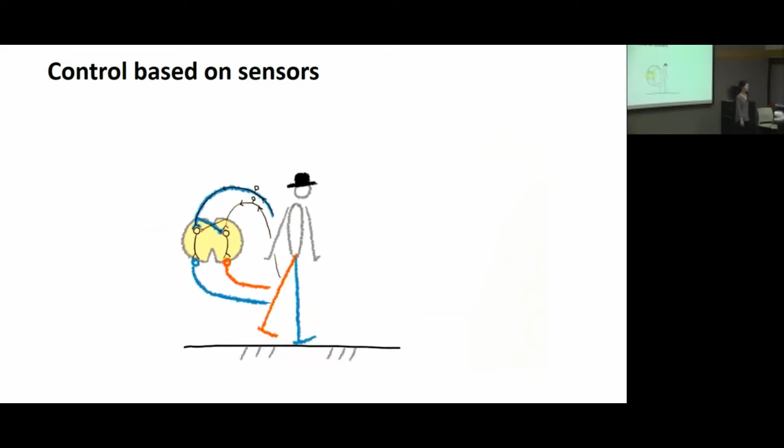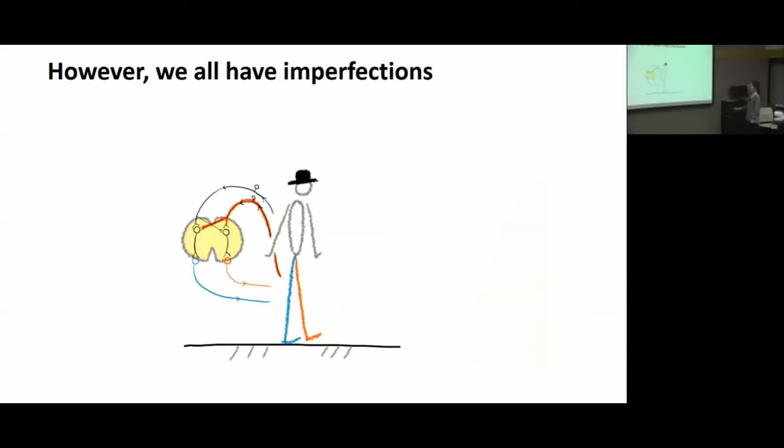However, life is not that easy. We all have imperfections, and sensors are never perfect, and sometimes it can tell you some incorrect information. So for example, here, the red leg didn't touch the ground yet, but the sensor thought it touched the ground by some noise or something. So it is telling incorrect sense of ground contact.

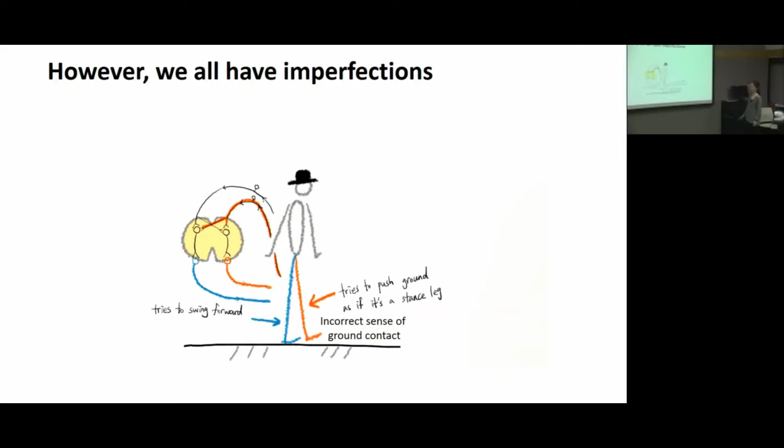And then what happens? Red leg now thinks that it is contacting the ground and it is now a stance leg. So it tries to push the ground, while blue leg thinks it is a swing leg now and tries to swing forward. And what would be the result again? Yeah, it fails again.

So for summing up a little bit, there are two conflicting ideas of generating cyclic movements. On the one side, there is central pattern generator, CPG, that generates rhythmic motor command without any sensory information. And on the other side, there's sensory reflex to generate motor command, now without a pattern generator.

So what's going on? What is generating pattern? Actually, both are working together. It is reported that it is better to have both. But the problem is that we don't know how to integrate two. These competing ideas, this conflict between two ideas goes back to 100 years ago.

Like here, Graham Brown suggested that CPG like this, even if he didn't really call it as CPG, but he just called it as two half centers mutually inhibiting each other, can generate cyclic movements like stepping. And about the same time, Sherrington suggested that sensory reflex can generate rhythmic motions like stepping.

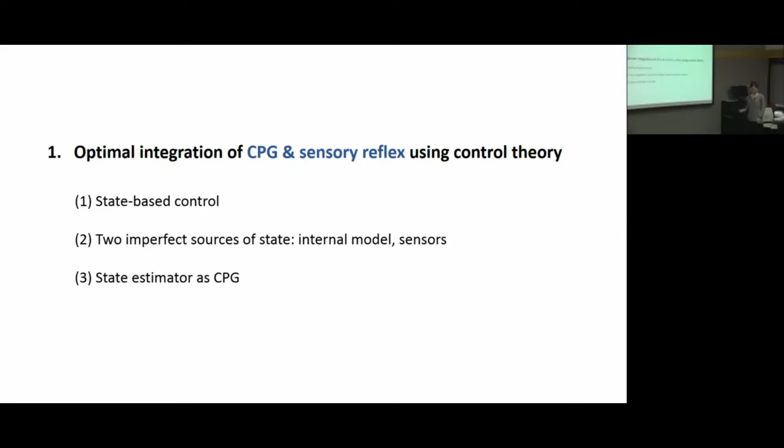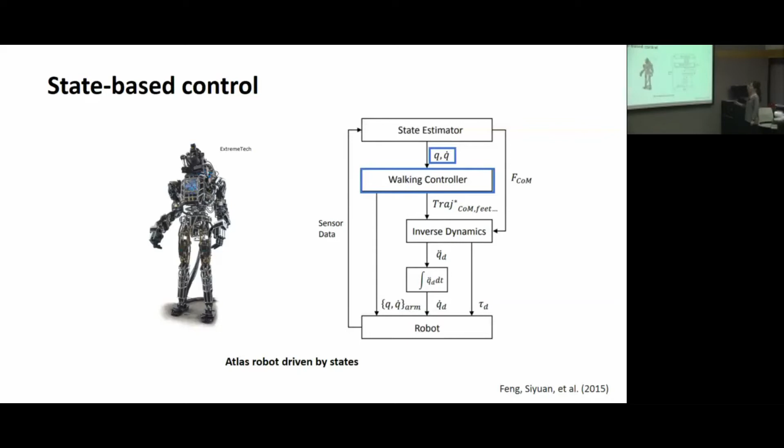But what is the input state here? What do we mean by we are using the state? Actually, there are two sources of states. One is the internal model, another is sensors, but they are both imperfect.

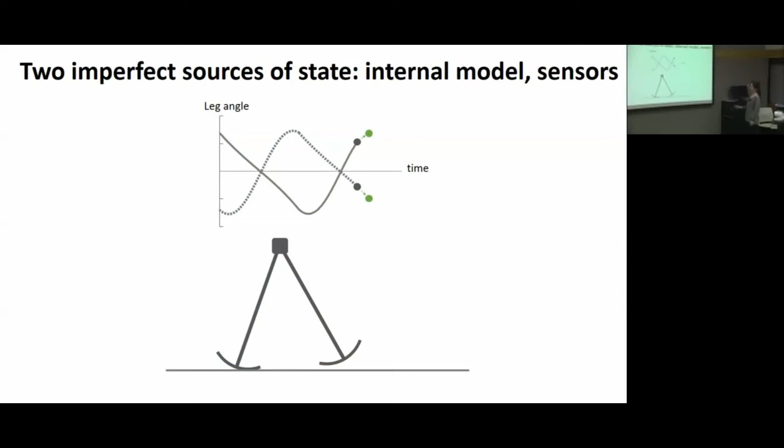So talking about the internal model first, let's say you have a current state like this and know how much torque is applied. Then if you know the characteristics of your system, you can predict what will be the next state. So like this. But on the other hand, you also have sensors. You can just measure the angle.

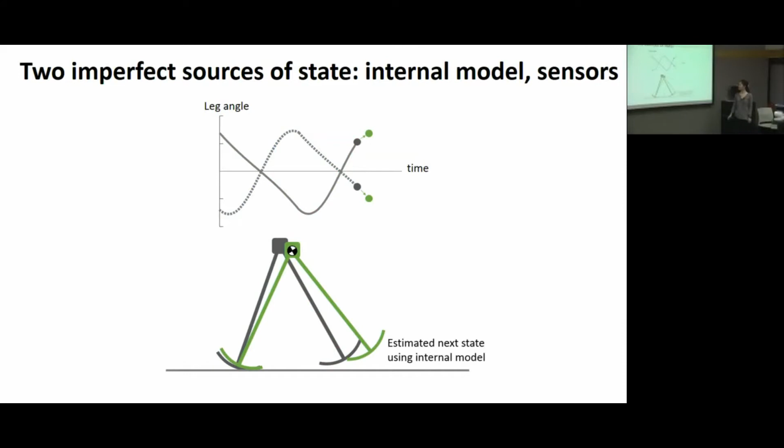But the problem is that they may not agree. The sensor can be wrong. Maybe it's telling you wrong information. But maybe your prediction can be wrong. Maybe something unexpected happened, like a strong wind blew or something. Then what should we do?

You can decide how much you trust your sensors. If you don't trust your sensors at all, so zero trust in sensors, you can just throw that away and use your predicted state as your next state and use that as your control input. But maybe you think your sensors are quite good and give infinite trust in sensors, then you are throwing away what you thought would be the next state. And in this case, the measured state would be your next state and will be used to control the system.

But you don't need to choose between the two. You can do something in between. So I said there is zero trust in sensors. So let's define some number that shows how much you trust the sensor. Starting from zero trust, L equals 0. And you can go to infinity, but you can stay somewhere in between, like this.

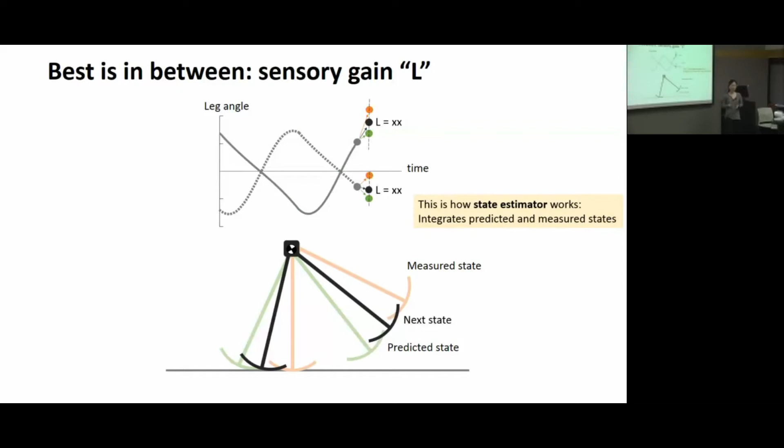So this is how state estimators work. They integrate predicted and measured states like this, and they can adjust the L gain based on how much they trust sensors. And what we can predict from this is that maybe both ends would be bad. It is bad to rely totally on the predicted state or totally on sensors. But maybe the best thing to do would be somewhere in between. I will go back to that point later.

So I introduced the state estimator, but how is it related to CPG? So I mentioned that there is a conventional way of representing CPG. There are two half centers that mutually inhibit each other, and the motor command comes out of the half centers.

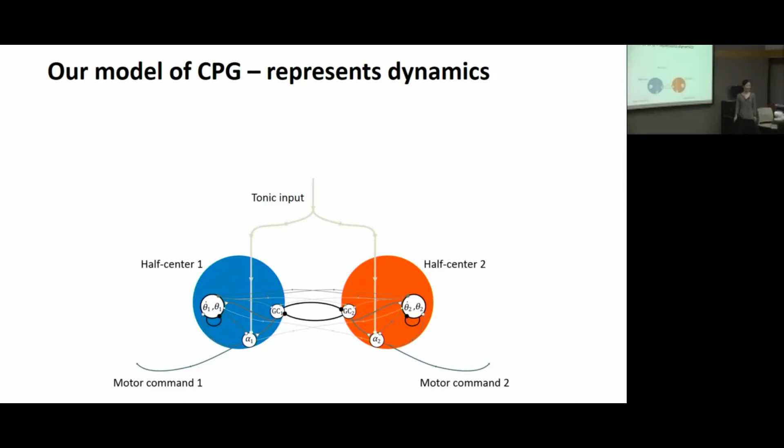But what we suggest here is that we can design CPGs like this. Actually, you don't need to worry too much about the details of the connections. But what I did here is I designed CPGs to have neurons that represent the state of the system, like leg angle here, angular velocity, ground contact, and then define the connections so that these neurons can predict the next step for you. So it is just a graphical representation of the equation of motion.

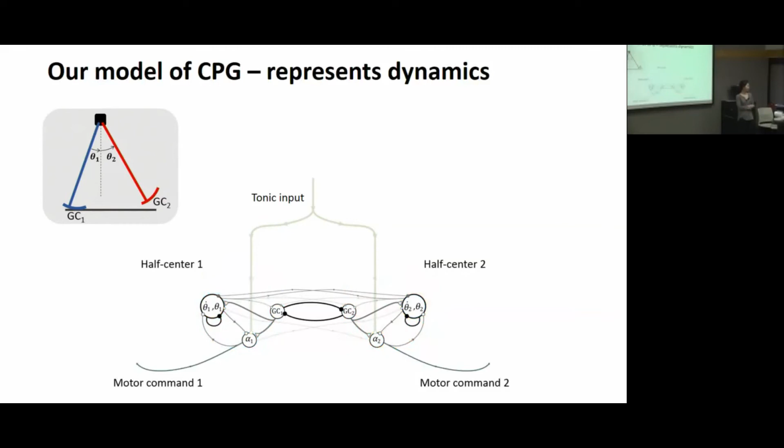And what is the benefit of doing this? Now you can see the first layer as an internal model that captures the characteristics of the system, and another layer as state-based control. Then you can map that into a control systems representation. There is a standard way to represent control systems for engineers. So here you have the internal model and state-based control. Then we can benefit from our knowledge of control systems.

And one piece of that knowledge is that we know how to use sensory information optimally. So we can add that to our CPG model. And maybe you can notice that there's L, how much we trust our sensors. And we can do the same thing here.

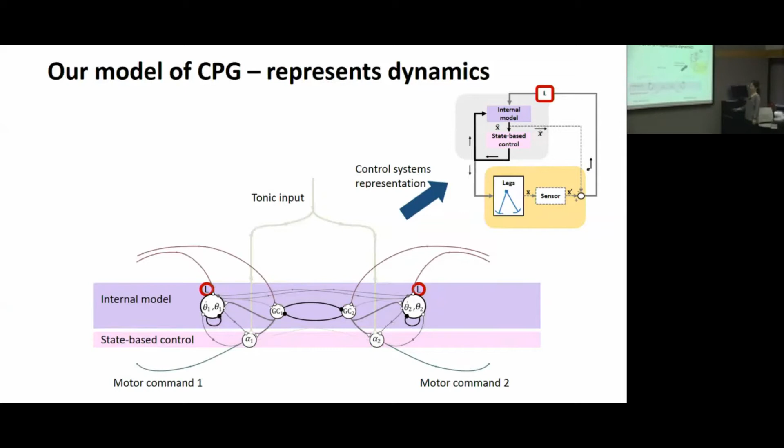So here I introduced the concept of state-based control and told you that there are two sources of that control. It can be the internal model and sensors. And the state estimator can decide how much you believe in sensors. And also I suggested that the state estimator can be viewed as a CPG. And we know the optimal integration of sensor feedback into this circuit.

And also our prediction is that maybe the two extremes are both bad. Feedforward, or using only CPG alone, would be bad. And feedback alone, or using sensor measurement alone, would also be bad. And the optimal would be somewhere in between.

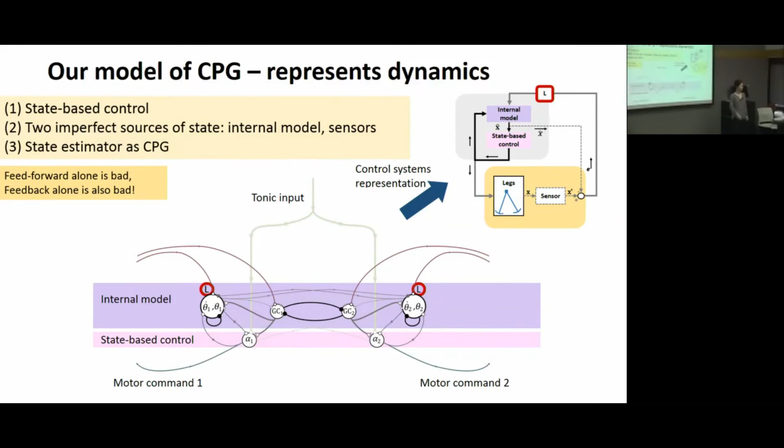So let me demonstrate it with our working model. I will control the working model based on states, as I introduced earlier. And then I will show you how bad it is to use pure feed forward or feedback. And then I will show that best performance can be obtained by optimally using both. So I mean having an optimal state estimator. And then I will tell you that fictive locomotion, the surprising feature of CPG, can also be generated from our model.

So here is how we defined our working model. We modeled legs like this. There's a mass and then legs and arc feet. And we have a CPG, as we designed earlier, and it is sending motor commands to the legs. And we are measuring leg angles and also measuring ground contact.

The reason I modeled human walking like this is based on previous studies. The model is simple enough, but it captures the necessary characteristics of human walking. And also it is feasible to make into a robot so that it can really walk. So I defined my model to be controlled dependent on state. These hip torques are a function of leg angles and ground contacts.

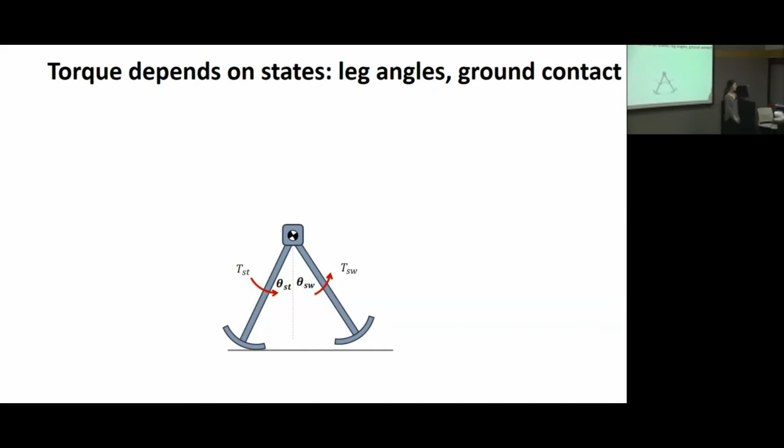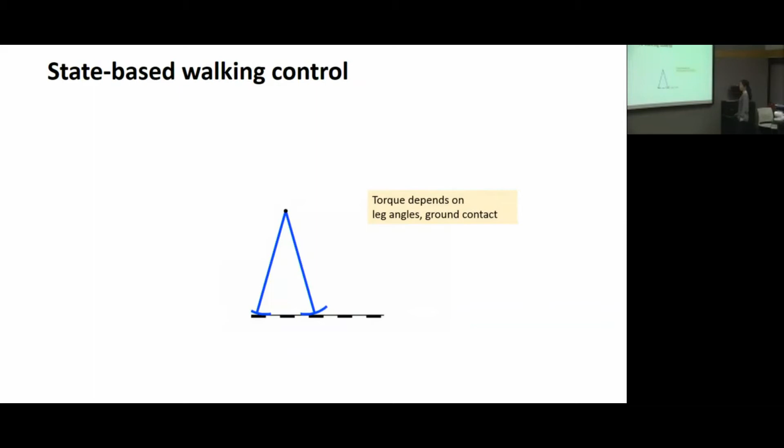And this is how it looks when I simulate it with MATLAB. So again, the torque was dependent on leg angles and ground contact. So let's see how bad pure feed forward and feedback are.

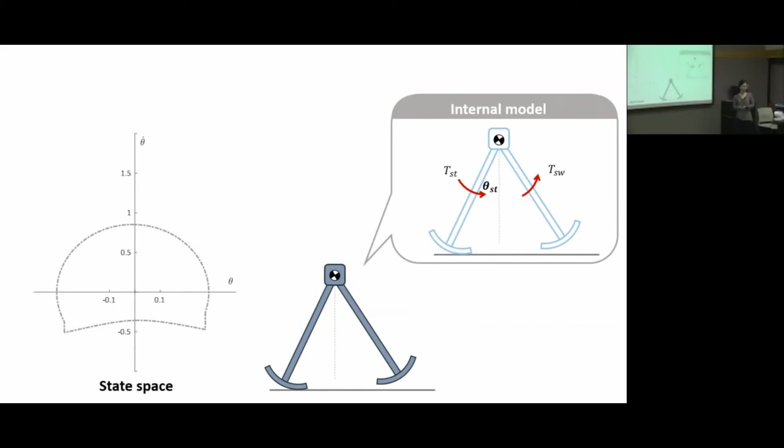To graphically show that, I'm introducing a state space representation. It represents leg angle and angular velocity at the same time. Stance leg movement would be represented like that, and swing leg would look like this. And if the model is working steadily, it will just keep repeating the same cycle. But if something bad happens, it may just go away.

So pure feed-forward is bad. How bad is it? What I mean by pure feed-forward is that we just have an internal model and copy the torque from the internal model, but we don't give any feedback to the internal model. And the problem is that there are always noise and disturbances and some unexpected things. And when I simulate this, it's really sensitive to noise and it's easy to fall like this.

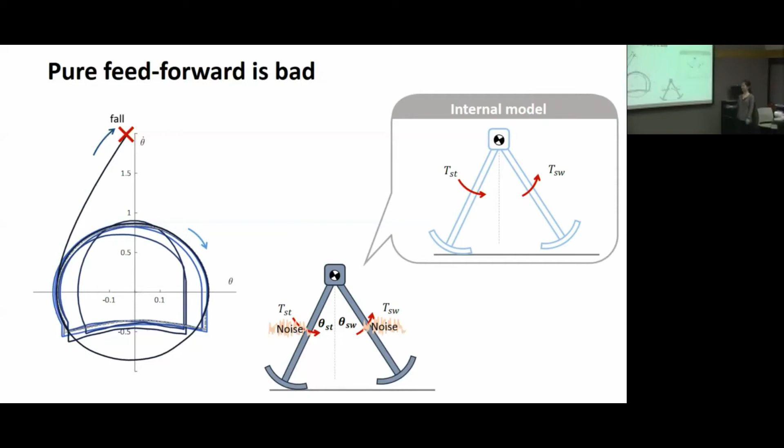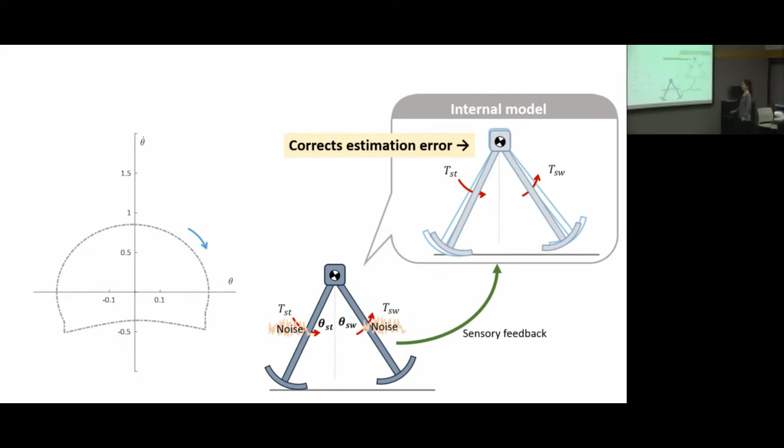Now let's try feedback. We can correct the estimation error by feeding the measurement to the internal model. But the problem is that sensor feedback is also noisy. So if we just rely on feedback, it will also be poor like this.

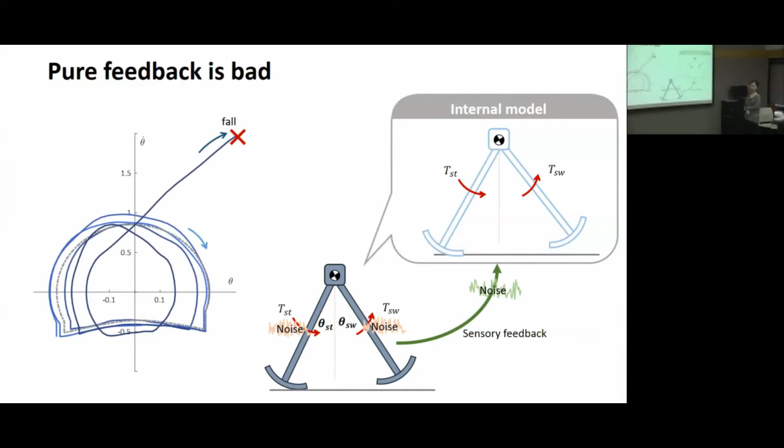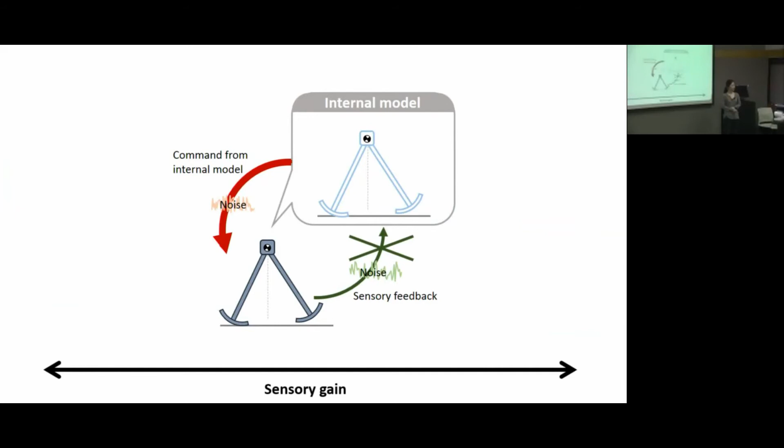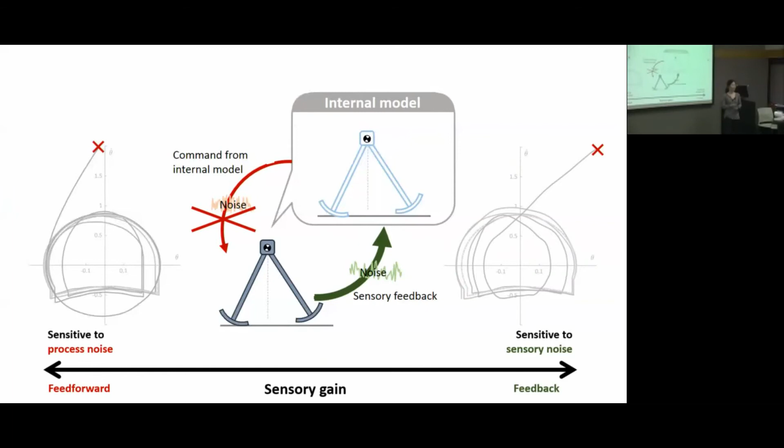So if we think about the gain again, it is how much you trust the sensor. On the one extreme, you can just rely on commands from the internal model and throw away sensor feedback. That's the feed-forward way, and it's sensitive to process noise. On the other end, you can rely on sensor feedback. Then it's too sensitive to sensory noise. But there can be an optimal combination in between, if we balance between process and sensory noise by selecting a proper sensory gain.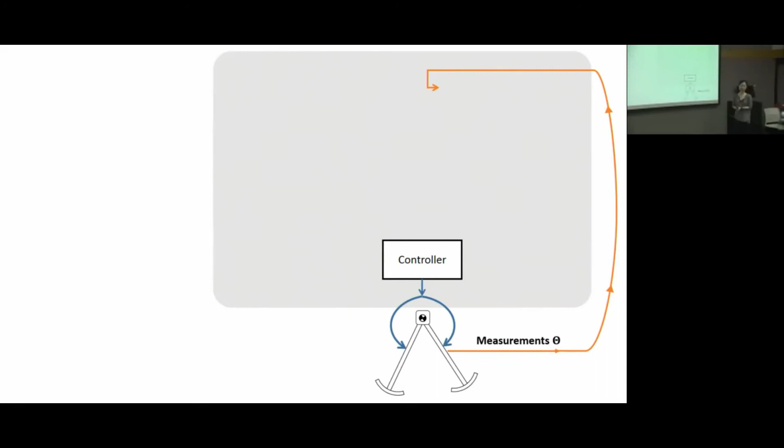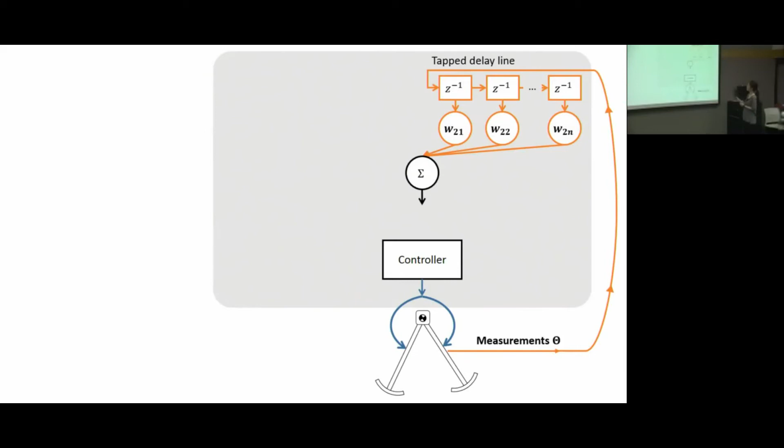You don't really need to worry about all the details, but if I tell you briefly, it is using its measurement as the input of the neural network. Tapped delay line just means that you are referring to your past history. And then I will multiply some weights to that history and sum them up to generate a state estimation. In a similar way, I can use inputs. And then I will train the network to adjust these weights to be a better estimator. It is an adaptive filter that can learn in real time.

So it learned to be an estimator like this. And then if I change the noise condition like this, it adapted to the new condition to get a better estimation. So the idea is the same. When your sensor became less trustworthy, you reduce weight on sensors, and then increase another weight to compensate for that. So it seems like a simple neural network can learn to be a state estimator, and it can also adapt to new conditions to handle external noise and sensory noise like this.

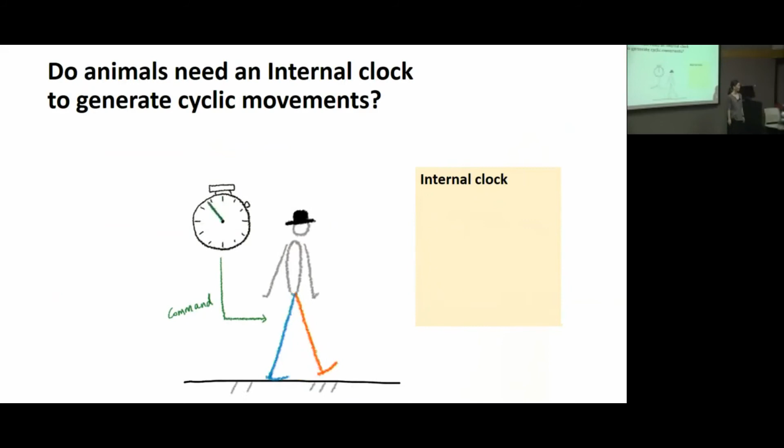So going back to our first question, do animals need an internal clock to generate cyclic movements? Sort of, but we don't need to call that an internal clock. Maybe it's better to call it an internal model. But we also need feedback. And we can integrate both so that CPG can be an optimal estimator. And also it's learnable from a neural network.

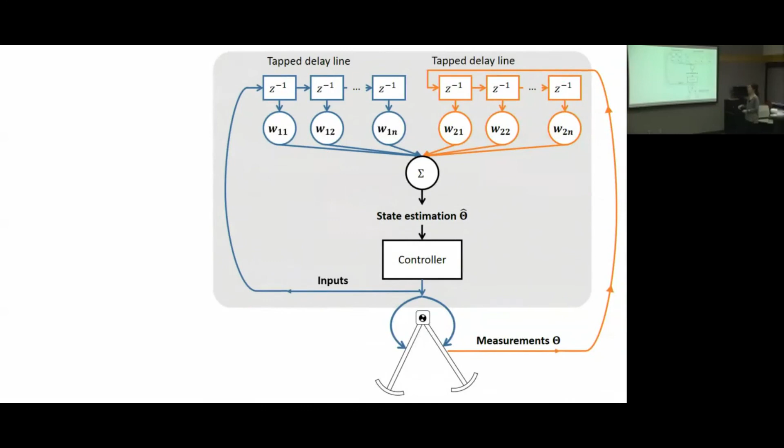Yeah. Was it to represent closer to biology, just simple spinal circuitry, or what was the goal? It's not really to represent the biological system, because for biological systems it's possible that they have multiple layers. But here, the reason I wanted a single layer is that I thought it is the simplest possible way to represent the dynamics of the system, because our model is highly linear, and I think one layer is enough. Then I can understand the result, like how W changes and how that is tied back to the understanding of changing gain. But I'm not sure whether I can do that with multiple layers. If I want to represent a highly nonlinear system, maybe I need to use multiple layers. Okay.